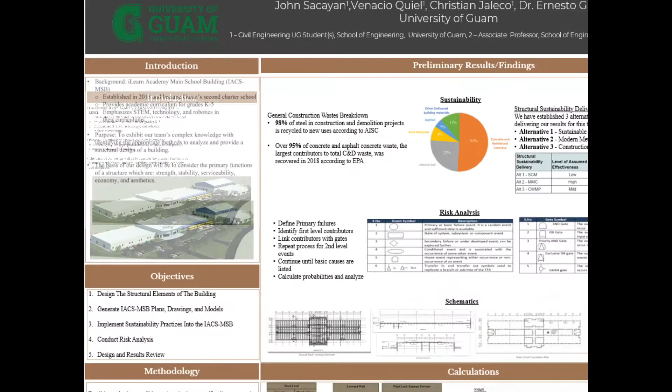Today, we will be presenting our preliminary analysis and initial design of the iLearn Academy Charter School building. iLearn Academy Charter School was established in 2015 and provides academic curriculum for grades K to 5, which emphasizes STEM, technology, and robotics. The purpose of this study is to exhibit our team's complex knowledge with identifying the appropriate methods to analyze and provide the structural design of a building.

The basis of our design will be to consider the primary functions of a structure, which are strength, stability, serviceability, economy, and aesthetics. Moving on to our four main objectives. Objective 1. Design the structural elements of the building. Objective 2. Generate main school building plans, drawings, and models.

Objective 3. Implement sustainability practices into the main school building. And Objective 4. Perform risk analysis. And towards the end of our objective, we will execute a design and results review to fix or revise any errors within our design calculations.

Onto methodology. For this project, we will be using design specification manuals such as IBC 2021, ASCE 7-16, and ACI 318-19. We will be calculating the loads acting on the building and analyzing each structural member. After reviewing the calculations with our industry advisor, we will start to draw models and schematics for a more detailed look at the structural members.

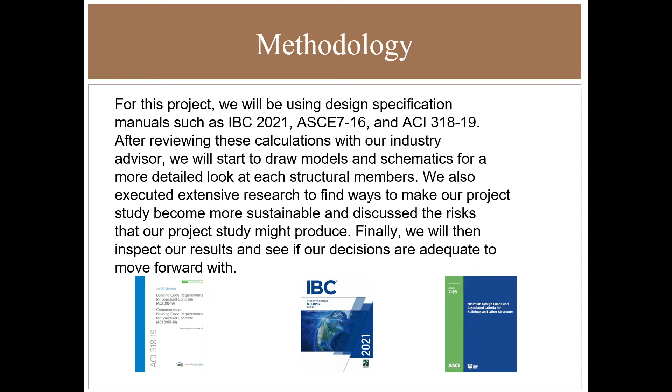For sustainability, our main goal is to figure out ways we can incorporate sustainable construction methods in Guam. We have established three initial alternatives on how we can achieve this goal. Our first alternative is to incorporate sustainable materials. Our second alternative is to introduce modern methods of construction in Guam. And finally, our third alternative is to generate a construction waste management plan.

So far, we have investigated our first alternative, and our initial statistic finding is that 51% of concrete and reinforced concrete, 11% of other delivered building materials, 5% of asphalt, 8% of rock materials, and 25% of littered soil makes up the general construction waste in the United States.

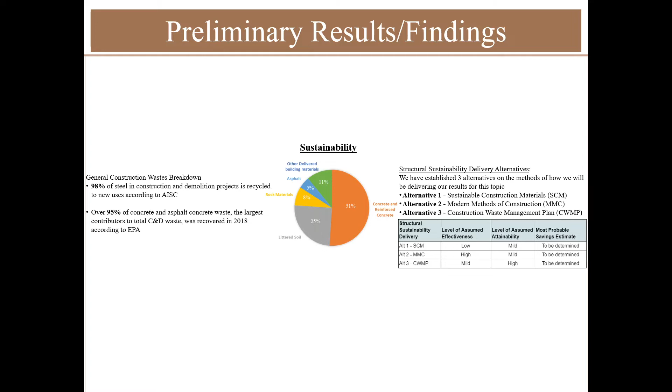According to EPA and AISC, over 95% of the concrete and asphalt concrete waste and 98% of steel in construction and demolition projects contributes as the largest total C&D waste. Fortunately, these wastes can be recovered and recycled for new uses. Our next step is to obtain data on a local scale, which will help us determine if our first alternative is attainable and effective in Guam. The same steps will be executed for the other two alternatives soon and will guide us in deciding which alternative plan is best suited for Guam's setting.

For the risk analysis portion, we decided to choose fault tree analysis based on our alternative choices, our abilities, and feasibility. To give a brief summary of what fault tree analysis is, it is a method of risk to not only distinguish types of failure, but also understand the factors and likelihood of these failures. This means that it allows us to break down the project into distinctive sections to see the potential failure of each event.

This is done by defining the primary failures, identifying first-level contributors, linking the contributors with gates, repeating the process for second-level events, continuing this process until basic causes are listed, and calculating probabilities and analyzing how each alternative compares with one another. The two figures shown represent the symbols we will be using in our fault tree.

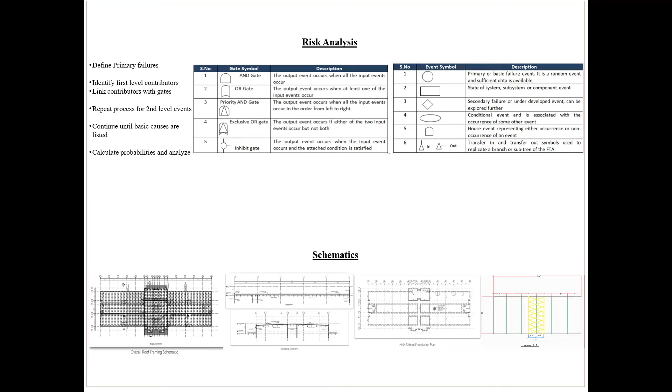These are the preliminary schematics we have obtained thus far. The figure to the far right is the beam spacing we will be using, which is 5 feet. We will now talk about our calculations. These will be the loads we will be considering. First off would be dead loads. This is the self-weight of the building, which includes double T beams, walls, roof concrete slab, miscellaneous objects, ceiling, and floor coverings. And our total weight we calculated is 6,923.14 kips. Secondly, live loads.

These are the preliminary live loads we have to date, which may be subjected to change as we move forward with the project. Lastly, wind loads. These are the parameters used for the calculations of the wind loads. Our building has a length of about 114 feet, base of 378 feet, and a height of 22 feet. In conclusion, our maximum design wind pressure for this project is 51.84 pounds per square foot.

Continuing on to the design load. We calculated our initial design load to be 650 pounds per foot. However, we've only considered the dead loads. Therefore, we expect our initial design load to change once live loads are considered.

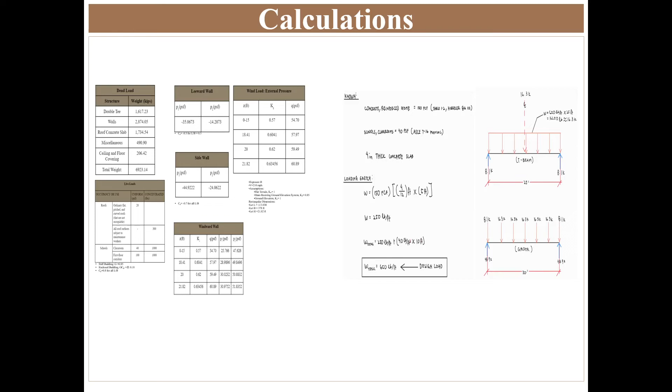To conclude, the ultimate goal is to develop a sustainability framework made with the intent for future companies to model after and apply to their projects. Because this is an ongoing project, we will continue to research sustainability alternatives considering aspects such as cost, environmental impact, and practicality on the island. We will gather information from firms if they have used any sustainability practices in their own projects.

The schematics and drawings will be further developed with software such as ETABS and SkyCiv. Knowledge from manuals and professors was used during calculations, and so far we have done multiple site visits and have seen the before and after construction of the project study.